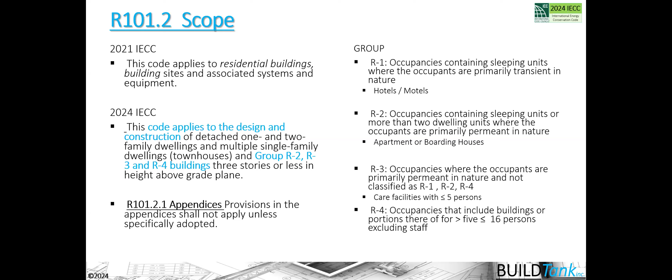So when we dive into chapter 1, we begin to talk about the scope of the code and the intent of the code. The scope documents changed a little bit. The code applies to the design and construction of detached and attached dwelling units. And then it talks about group 2, group 3, and group 4. And I just put a little refresher on the side there about what group 1 through 4 means. So if you don't know what that means, you can refresh yourself there.

The bigger change happened in the intent. The intent used to be a small paragraph that combined 3 sentences, only 2 of which remain, but now it's a big paragraph, and it's really changed quite a bit here. So the first change is that the code is intended to provide market-driven enforceable requirements there.

What that means, I think, is open to interpretation a little bit, but the idea is that, well, from my perspective anyway, the energy code is unjustly being thought of as the code that is increasing the cost of construction, when in reality, all codes and code advancement increase the cost of construction. And we also need to remember that, especially coming out of the pandemic, material costs and labor costs and all other kinds of things are influencing the cost of construction there.

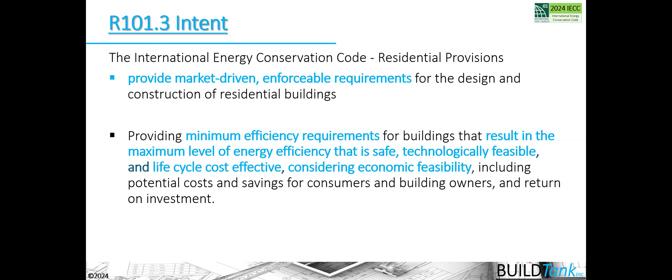So anyway, the code's also providing minimum efficiency requirements that result in the maximum level of energy efficiency that is safe, technologically feasible, and life cycle cost effective, considering economic feasibility and so forth. So you can see this whole focus on cost, but also this new concept of life cycle cost effectiveness, which means that we need to begin to think about carbon potentially, or other things that are affecting the life cycle cost of our buildings. Now, carbon isn't specifically referenced in the intent statement, so I don't want to misconstrue that there.

But it does bring up the question of what minimum compliance means, or what the word minimum itself means. And I want to throw this out because we tend to have a negative connotation with the word minimum as referenced with code specifically. And I want to be sure that we all understand that the word minimum doesn't have a good or bad connotation. It basically means that through a national consensus body process, we have agreed that these minimum requirements ensure health, safety, and efficiency in our homes, and that you can go beyond that, but the code is asking for a specific baseline of efficiency, which is deemed to be the minimum required. Again, that doesn't mean bad or good.

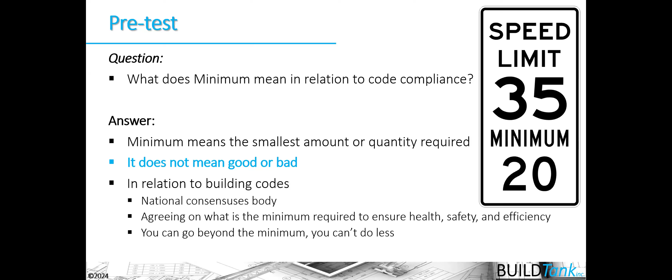It means basically that if you build to the minimum requirements of the code, you're going to have a well-performing house that meets those requirements, and people are going to, in general, be happy with that across the country. The majority of people will be happy with that.

The intent statement does continue on and say that there are all these optional supplemental requirements that could be looked at from a code perspective to achieve zero energy buildings by 2030, and that the Energy and Carbon Advisory Council, approved by the Board of Directors, will look at those things from a policy perspective. But what this is ultimately doing is moving anything that has to do with additional efficiency beyond what the code is looking for, things like electrification or solar ready, or even carbon counting and carbon sequestration in buildings, to the appendices, and it won't be housed inside the body of the code itself in the future, and now as well. The code includes non-mandatory appendices, and that's where it ultimately is going.

Requirements contained in the code will include, but are not limited to, prescriptive and performance-based pathways. So we need to remember that there are requirements in the code and there are compliance pathways in the code. And the requirements generally revolve around how you install a specific provision that's in the code, and the pathways are demonstrating that you're meeting the energy budget requirements of the code there.

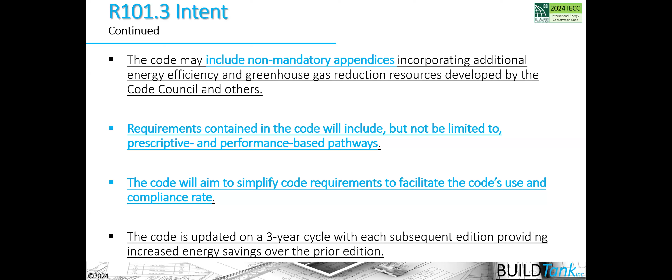So they're kind of two different things. The code will aim to simplify code requirements to facilitate the code's use and compliance rate. That's always something that the code is aiming to do, and that's what's happening right now as we begin the 2027 code development process, is that proposals are being made to help clarify requirements and make it more enforceable, and our ability to comply with those things will continue to happen there.

And then the last part of this intent statement includes statements that were already in the intent statement, these two last sentences, to provide flexibility. Basically, understanding the code and where flexibility is provided in the code really comes down to the compliance pathways in the code. And the code isn't intended to abridge safety, health, and environmental requirements.

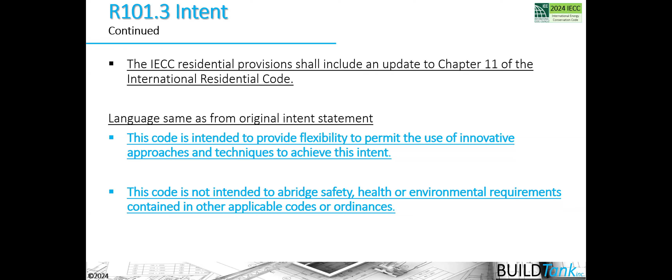So we need to remember that we're talking about a suite of codes that work synergistically together to create safe, healthy, environmental requirements or efficiency requirements that take place in our buildings when we're building to the code requirements, not only from the energy perspective, but the IRC perspective and the IMC and whatnot. Again, these are a suite of codes that work together here.

Okay, so above code programs can be used where such buildings also meet the requirements identified in table R405.2. So those are the requirements that are basically revolving around how you install specific things that are called out in the code. Generally, we're talking about insulation installation, air barrier and air sealing installation, installation with regards to mechanical systems. So doing a proper Manual J, S, and D, for example, those types of things are covered and put into the mandatory requirement table in the R405.2 section.

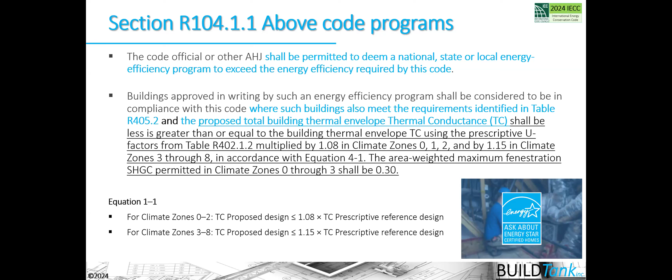But there are some people or organizations that might come to you and say, can we build an Energy Star house instead of following the actual requirements of the code? And you can do that to some extent. Remember that you still have to abide by the mandatory requirements of the code that are listed in the R405.2 section. Also remember that the word mandatory has been taken out of the code, so requirements are required, which in essence means that they're mandatory.

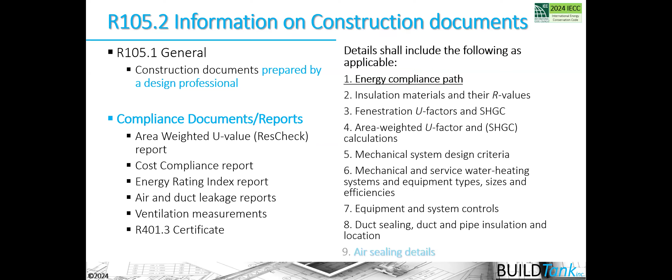Then we have the information on construction documents. This really hasn't changed much, but there is a section after this that is talking about solar ready systems. And if you are going to adopt this section of the code, the solar ready provisions need to be put on the construction documents as indicated here. So even though it's not in that construction document section, the solar ready systems do need to be put on the construction documents.

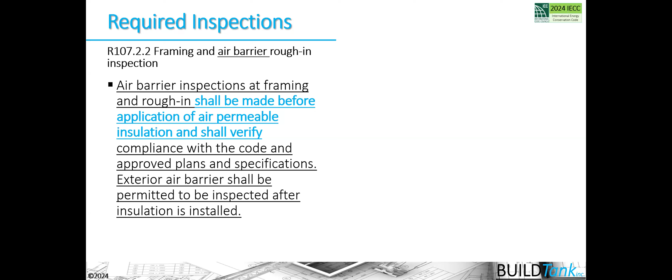Then we get into the inspection section of the code. And I point this out because this section right here has been added to it: air barrier inspections at framing and rough-in. But also you'll see that other sections of the code now call out specifically the inspection that's needed, but also tailor it to the energy code so that we're looking at corresponding R-values, correct location, and proper installation of the insulation that's been installed in our homes, for example.

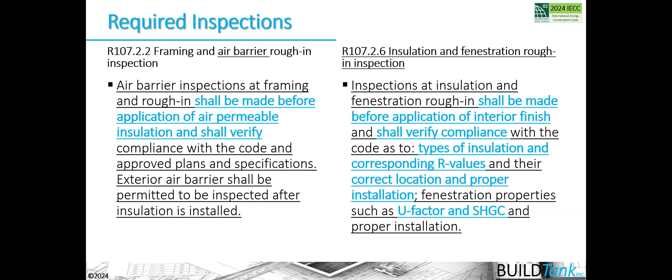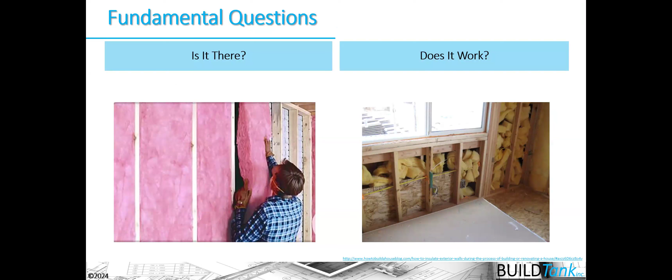Now it talks about other components that need to be inspected, and again, it's tailored from an energy code perspective, which means that we're really looking at our homes more from a performance perspective. We're looking at not only has the insulation been installed, but has it been installed so it works and performs, and does the R-value that's been installed meet or exceed what the builder or architect proposed in their compliance pathway for that building. So we need to ask: is it there, but does it actually work as it's been installed from the perspective of the code?

Which brings us to the last section in chapter 1 that I wanted to point out, which was approved third-party inspection agencies. This section has been revamped pretty substantially in order to help jurisdictions ensure that they're getting approved third-party inspection agencies that can help them enforce the code.

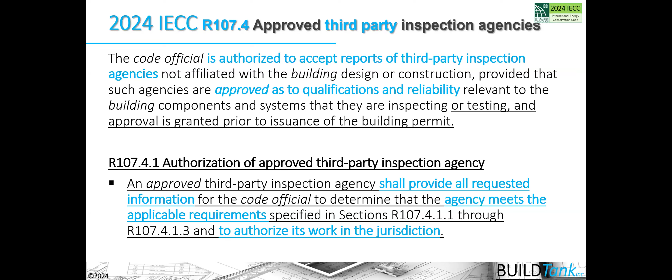The third party needs to provide requested information to the authority having jurisdiction, but they need to demonstrate their independence and ability to actually do the inspections. The third party needs to ensure they have the proper equipment, because the code doesn't prohibit a jurisdiction from buying a blower door and doing those inspections themselves. Most jurisdictions haven't wanted to go that route, so we need to ensure approved third parties have the equipment to actually do those types of inspections, like testing mechanical equipment or whole house leakage.

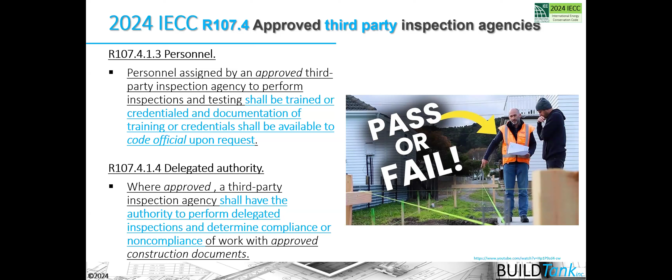This part makes it clear that generally speaking, it's not just an approved third-party individual you're hiring, but a company, and we need to ensure all the personnel within that company have the proper training to inspect to the requirements of the code. The third party you're hiring must actually have the authority to perform the delegated inspections that determine compliance with the code, meaning that if you're using an approved third party, you're giving them authority to approve an installation, or say it failed inspection and needs to be re-inspected. And lastly, we have to keep records and submit reports as required by this section of the code.

So really what this section of the code is doing now is saying that approved third parties and authorities having jurisdiction need to have a conversation, creating basically a scope of work so everybody's on the same page about what you're giving them authority to inspect and what you're not. You have the ability as a code official to approve a third party, but also to disapprove that third party, which in essence removes this perceived or actual conflict of interest about who's actually paying for this third party to do their work.

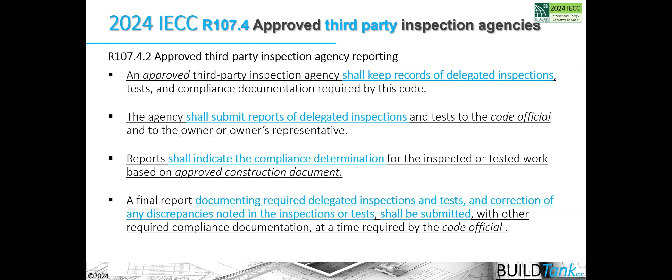So I urge you to take a look at this section and potentially utilize it so that we get better enforcement and compliance with the codes that are being adopted here.

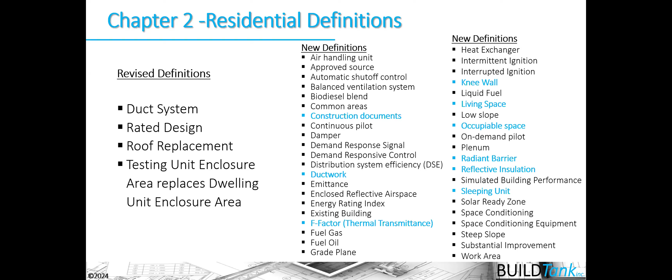Now, the definition sections always change and morph. Some definitions get redefined and new definitions get added to the code, like knee wall, construction documents, or ductwork. All these things get either redefined or added to the code, so you should always take a look at the definition sections to ensure you're up to date.

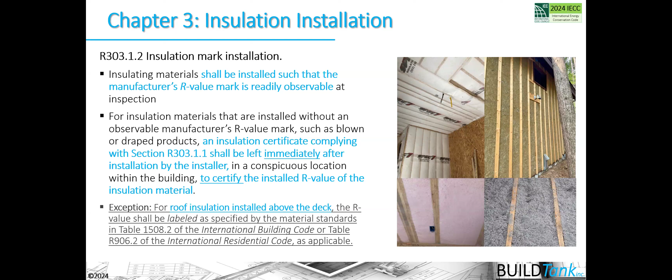This section didn't change dramatically, but I wanted to make sure everybody was aware that these insulation certificates are required, especially for insulation that doesn't have an R value mark on it. We have no idea what the R value of these materials are. These insulation certificates are now required to be left immediately after the installation by the installer, to certify the installed R value of the insulation material, because nobody other than the installer actually knows what the R value is—it's completely based on the density they set their blowing machine to. So make sure you're collecting those certificates after installation and comparing it to what they've proposed to put in the house.

Radiant barriers and all reflective insulations are now within the code in specific sections, in a much more robust way. So if you come across radiant barriers or reflective insulations, you now have places in the code to reference those things. Residential efficiency is covered in chapter 4.

Now moving to chapter 4, we're talking about requirements for air sealing and air barriers and insulation installation, as well as the compliance pathways that basically tell us to choose a compliance approach for permitting, comply with the provisions or requirements laid out in chapter 4, and then ultimately prove to the code official through testing or additional compliance documents that you've met the requirements of the code, and that what you proposed has actually been carried out to fruition to release the certificate of occupancy.

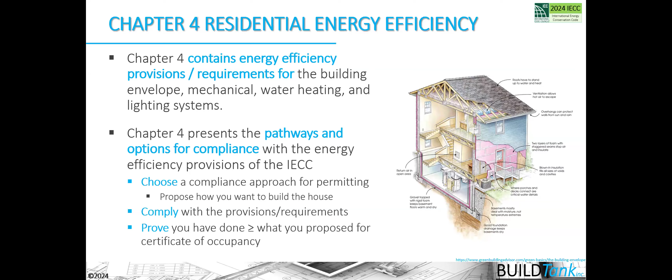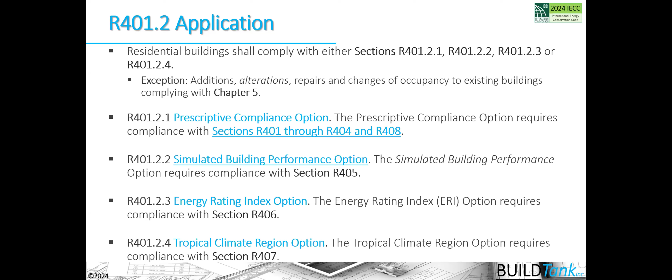With regards to the compliance pathways, we still have the prescriptive compliance option, the simulated building performance compliance option, and the energy rating index compliance option, as well as the tropical climate region option that we won't really be talking about here. You still need to provide the certificate in order to get your certificate of occupancy. Some things have been added to this certificate, like the R408 additional efficiency measures and the location and dimension of the solar ready zone, where one is provided.

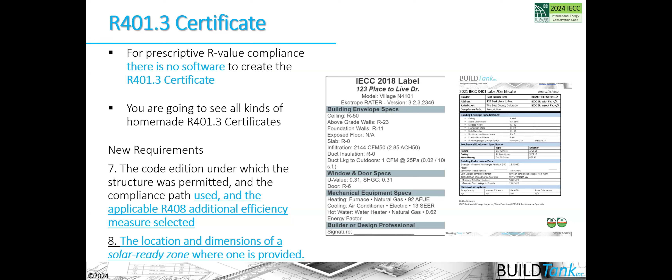These certificates are generally printed out of software when you're using a software-based compliance pathway. When you're not using a software compliance pathway, you might see a certificate that's hand-generated, like the one on the right here, for the R-value compliance approach, for example, that doesn't have a software accompanying it.

The building thermal envelope is basically broken down into two prescriptive pathways. You can either use the prescriptive R-value, U-value table, or you can use what's now called the total component performance alternative. It used to be called the area weighted U-value or UA performance alternative, but you'll see here quickly why that name has been changed.

Remember that if you choose to use the prescriptive R-value, U-value table, it is the least flexible compliance option. There's really no compliance tool other than declaring to the code official that you're going to use the thou-shalt-do prescriptive compliance R-value table. You need to add those R-values to your permit set, and then through inspection and documentation, you'll have that.

There's no longer a mention of the additional efficiency packages in this specific section, as was done in the 2021 IECC. You need to go to section R408 to see anything that has to do with additional efficiency packages. But we do need to note that the additional efficiency packages are only in relationship to the prescriptive compliance options. The performance compliance options have a different way of getting that additional efficiency that we'll see here in a minute.

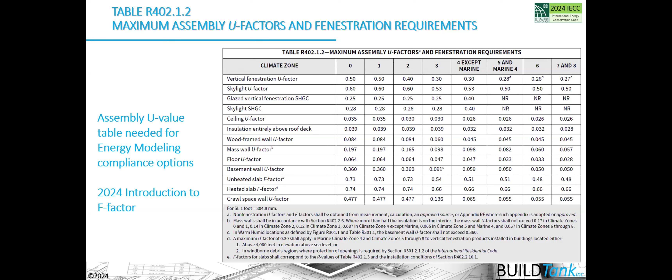Now, the R-value and U-value tables have been reoriented. Their X-Y axis has changed so that all the requirements are down the left-hand side and the climate zones are across the top here. But the actual U-values haven't changed that significantly.

Same with the R-value table here. You can see in climate zone 5, these are the changes that happened in climate zone 5. So there are changes that happened in both these tables, but the most significant change is the reorientation of the table, which the code development body felt made this table easier to read and understand.

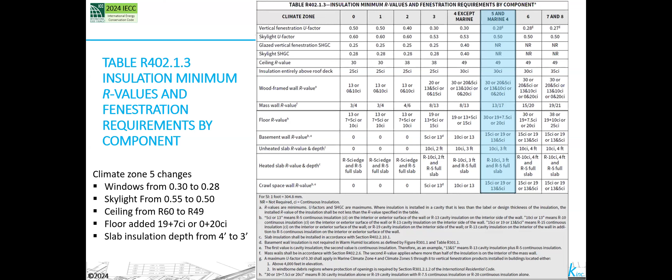You also want to always look at the footnotes of these tables. The footnotes talk about how R-values change when insulation is compressed in a cavity. It tells you what continuous and cavity insulation means. It gives you some variance or ability to change the U-factor of windows in certain climate zones. So you definitely want to review the footnotes associated with these tables.

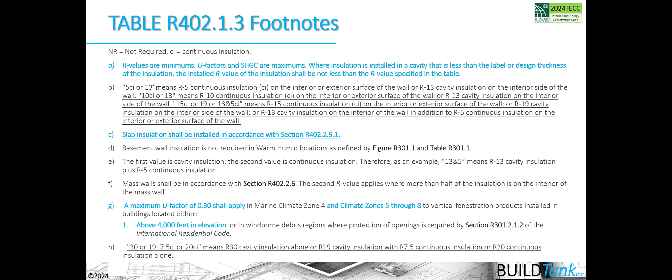And just as a reminder, the U-factor table is talking about the assembly of things. So the U-factor of a window, for example, is talking about the window in its entirety, its assembly: the wood frame, the edge spacer, the two layers of glass, the gas that might be in there, the hardware that's used to open and close the window. All of those things come together to create the U-value.

Each of those things has a component R-value, and R-value is the reciprocal of the U-value, or the U-value is the reciprocal of R-value. So basically, the R-values table and the U-value table are expressing the same thing in different ways. One is an assembly and one is a component that you put into the assembly.

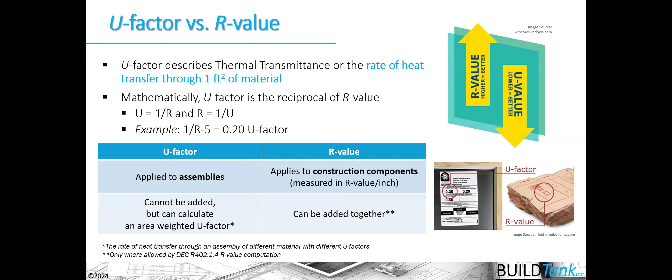Okay, the other modeling approaches for compliance are either the prescriptive component performance alternative, the simulated building performance, or the energy rating index. This gives you more flexibility. It helps you understand the cost effectiveness of the components and assemblies you're putting together to demonstrate compliance. And it improves the professionalism of our contractors and industry, because we need to really think about what we're installing in our homes rather than being told what to install.

The best thing about these different compliance approaches that use an energy modeling software is that you can try and fail 10,000 times before you buy a nail to build that house, and ultimately succeed in meeting the requirements of the code, because they allow you to do what we call a trade-off.

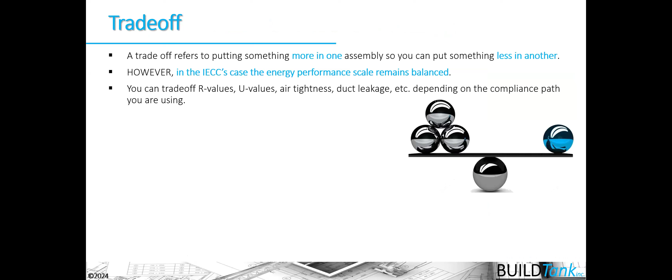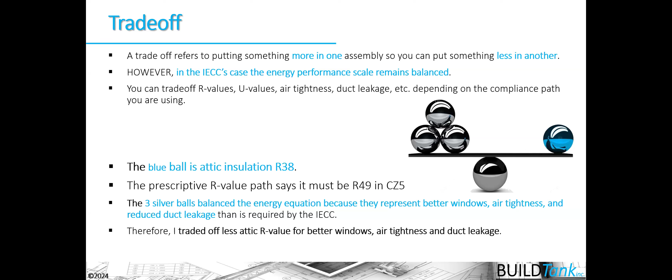The trade-off allows you to put something more in one location so you can put something less in another location. So in this example, if I decide to put R38 attic insulation in the attic, that would be represented by the blue ball here. I might need to choose three other things to do something slightly more on in order to keep the balanced energy budget that the code is requiring us to achieve in order to demonstrate compliance with the code.

There are 3 softwares that allow you to do these types of energy trade-offs or energy compliance pathways. Reminder that the REScheck software only allows you to do the total UA alternative, or what is now called the total component alternative approach, whereas REMRate and Ekotrope software allow you to comply or do energy modeling for all of the compliance approaches.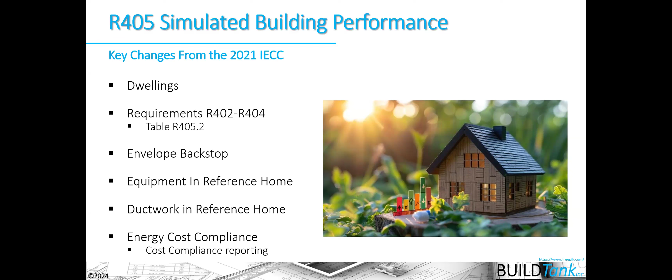So the next compliance approach is the simulated building performance approach. The key change here is that we're now talking about dwellings rather than homes or buildings, making sure that we understand these performance approaches can be used on attached dwelling units or multifamily 3 stories or less. The requirements table has been modified slightly, making sure we understand that all of the requirements detailed in sections R402 through R404, how you install these things, are required by this pathway as well. The envelope backstop changed, equipment in the reference home changed, ductwork in the reference home changed, and so on.

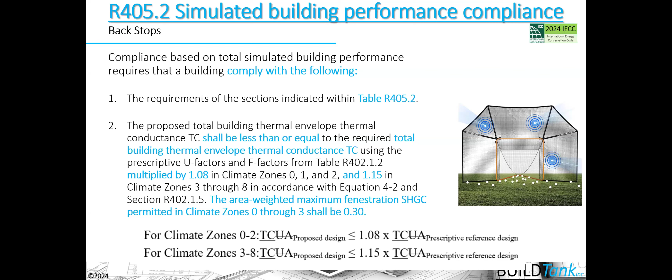Going to the backstops, you see that the backstop has been changed to focus on the total conductance through the building thermal envelope. This is why the additional efficiency packages aren't required for this compliance pathway, because if you're in climate zones 3 through 8, now your total building thermal conductance has to be 15% better than what would normally be required by the 2024 IECC. So in essence, the additional efficiency packages are getting that 15% increase in efficiency. To give you that same type of flexibility, you just have to now get 15% efficiency in your total thermal conductance while doing the energy modeling. You're able to choose a variety of different ways of doing that with your building thermal envelope in this pathway. So it still gives you a lot of flexibility, but the new requirement is that you have to be 15% better if you're in climate zones 3 through 8.

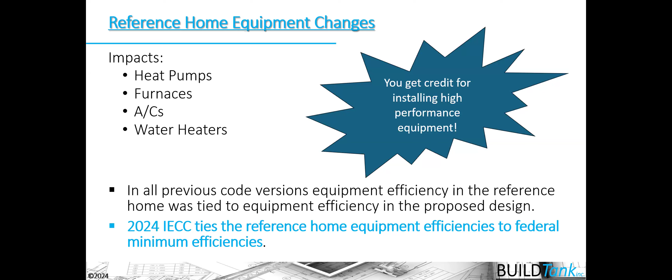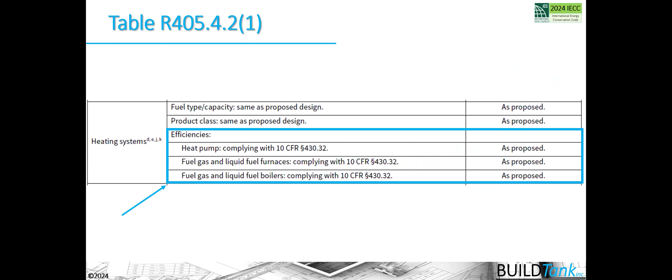In the reference home, now you are looking at heat pumps, furnaces, air conditioners, and water heaters. The 2024 IECC ties the reference home equipment efficiencies to the federal minimum efficiencies. So now if you're installing a heat pump that has an efficiency significantly better or more efficient than the federal minimum efficiencies, you're going to get credit in your trade-off budget for this. So again, you have more and more flexibility here. You can see that if you go into the reference home itself, published in section R405.4.2, it's talked about in the reference home versus what you're proposing to put in that house. So if you propose a heat pump that has a COP of 3, you're going to now get credit for that in your trade-off budget.

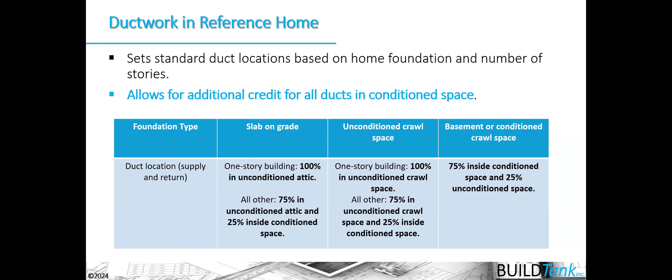Ductwork works the same way, where the location of the ductwork can now give you additional trade-offs that weren't available in the 2021 and earlier code editions. So if you have ducts all located in conditioned space, you're going to get some trade-off credits for that. Remember that the softwares that can do this type of energy modeling does not include REScheck. You're only looking at REM Rate, Ekotrope, or potentially Energy Gauge. You're unlikely to see the Energy Gauge software in our climate zone because it's primarily used in Florida.

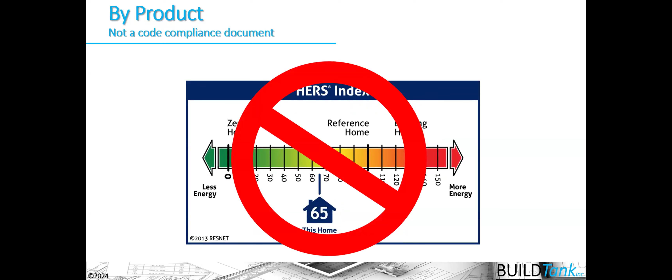Also, we need to understand that as a byproduct of the simulated building performance approach, you might see a HERS energy rating index generated, but that HERS score is not an index score that can be used for compliance with the IECC. The energy rating index alternative used in the IECC has changed a little bit. Again, there are references to dwelling units, and the requirements table should be table R406.2, not 5.

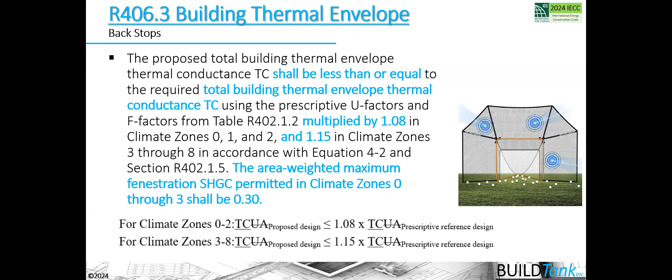There are ensuring that the requirements that are in the R402 through R404 sections are implemented, as well as the envelope backstops and other requirements here. So let's go in and make it clear that the envelope backstop is the same backstop that was required in the R405 section, basically ensuring that the thermal conductance of the building thermal envelope in climate zones 3 through 8 is 15% better than. Again, you don't have to deal with additional efficiency packages in this pathway because this is how you're getting that additional efficiency through this backstop here.

When you're calculating the energy rating index score up until this code, the 2024 IECC, there was an amendment to the ANSI standard 301 for how you calculate the energy rating index score that removed, that changed the ventilation, how ventilation was calculated in the software here. That portion of the code was removed in the 2024 IECC, and now the ANSI standard 301 is being used as intended there.

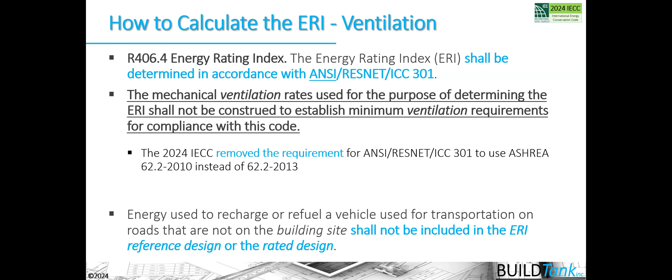The ANSI standard is also what's used to calculate the ERI for the HERS Energy Rating Index, but those scores now are closer together, but they won't be exactly the same for a variety of other reasons that we don't have time to go into.

But you should know that they are closer to each other than they ever have been. Now, the ERI compliance approach here is asking you to do an energy model to benchmark the house on an energy rating scale and then determine if the energy rating that that house gets is equal to or less than the energy rating requirement that is detailed out in this table here. You can see in climate zone 5, you now have to achieve an energy rating index of 54 or less.

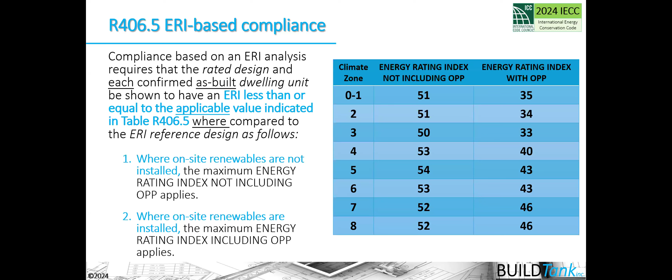And if you also install on-site power production for that house, you now have to be at least below a 43 on this table here. So you want to make sure that you're looking at the on-site renewables that you're installing here that are called out specifically in the R406.5 section here.

And it says that the energy rating index shall be permitted using the average dwelling unit energy rating index. Here, that's number 2 in the exceptions, which is basically meaning that if you have a stacked multifamily building that's 3 stories or less, that's governed by the residential energy code, that you can use an average of all of those scores to comply with the score here.

Although you will see here in a second that sampling is allowed too, specifically for energy rating index scores and performance testing requirements here.

Verification of the approved third agency specifically for this path has changed a little bit here. You can use the third party to develop the ERI score, but you still need to make a choice about all those requirements, the R402 through R404 sections. Are they going to be completed and inspected by the authority having jurisdictions or by the approved third party? And therefore, you need to go back into Chapter 1 in order to understand who's required and that the third party has the same skill levels as your jurisdiction inspectors do.

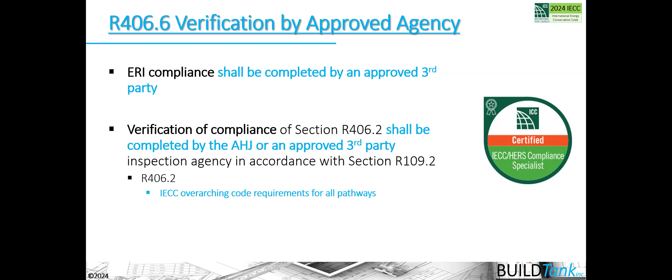The compliance softwares that have been available to do compliance for the software compliance approaches now are being looked at a little bit more closely by the IECC. There's this section that says that the ERI software shall be using approved software tools that are defined by the ANSI 301 standard there.

You'll see also in the R405 section that there's a reference to approved softwares, and basically my belief is that sometime in the future, ICC is going to ask RESNET to have better oversight over the softwares and how softwares are interpreting the code within the body of their software there, which really isn't happening at this part, although this is a step forward in the right direction there.

Okay, so now we're moving away from the different compliance pathways to the actual requirements in the code. The requirements of the code are listed in R402 through R404 section of the code.

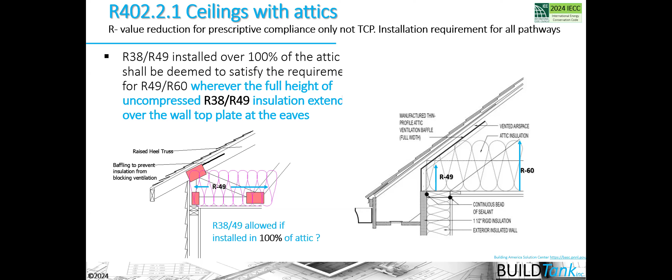But it's also not only allowing you to reduce the R value, but it's also saying that that R value needs to be installed completely over the top plate. Therefore, you're probably going to have to install a raised heel truss in order to get that full depth of insulation, uncompressed insulation over the top plate there.

And that's why the requirements listed within this section for how you install something are required regardless of the compliance approach that you actually use.

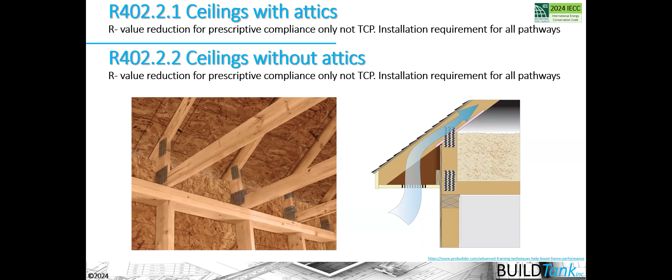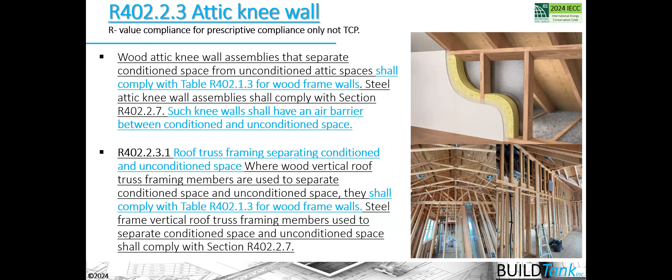Knee walls are new to the code in the 2024 cycle. They're defined as a wall that separates conditioned space from attic space or unconditioned attic spaces. You want to look at the knee wall section to make sure you understand all the requirements associated with knee walls, not only there, but also in the air barrier, air sealing, and insulation installation table. Steel framing has been modified slightly.

Steel framing in ceilings, walls, and floors shall comply with the insulation requirements in table R402, the R-value table, and the U-factor requirements in table R402.1.2, and also within the table that is specific to steel framing, that's in the code as well.

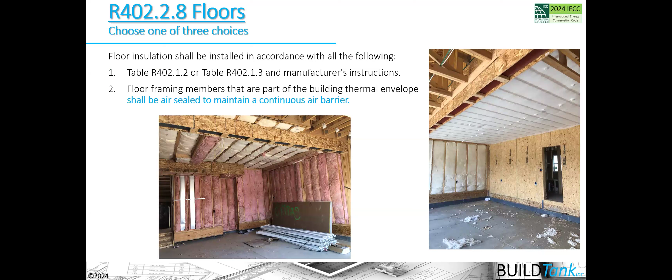The floors section has been modified a little bit as well, because you're now allowed 3 different ways to install the insulation in the floor section. They have broken it out even more to try to make it more clear about the different ways the installation of floor insulation is allowed now.

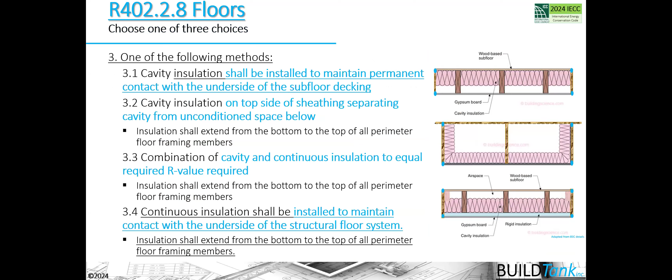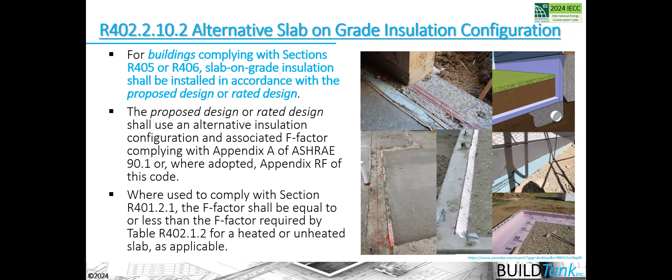In the same way, the slab insulation installation section specific to alternative slabs: basically, when installing slab insulation for the R405 or R406 pathways, you have the ability to trade it off or install less insulation, or potentially install the insulation in different ways than might be allowed in the other compliance approaches. That's called out specifically now in this alternative slab-on-grade insulation configuration.

Crawl space wall insulation now references the floor insulation installation section, R402.2.8, which means that if you have a vented crawl space and you're insulating that floor system like this gentleman is doing, you now need to sheathe the bottom of that floor assembly in order to make it work and be in compliance with the floor section that we briefly went over earlier.

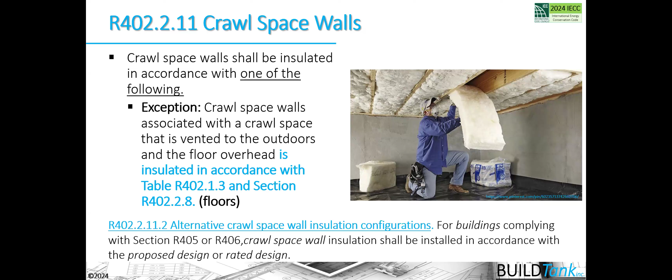There's also this alternative crawl space wall insulation configuration, which again references sections R405 and R406, those performance energy modeling compliance approaches, where you might install either less insulation or install the insulation in a different configuration. Radiant barriers, as I said earlier, are called out specifically in this section as well now, so you need to look at those. Those are the biggest changes in the R402 section with regards to insulation, air barriers, and air sealing.

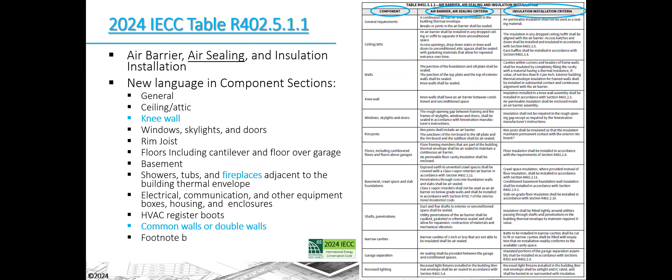The air leakage testing section now gets us into the air sealing, air barrier, and insulation installation table. There have been a couple key changes here: the addition of knee walls to this table, and additions for fireplaces and common walls or double walls like shaft liner area separation walls. The details required on your construction documents largely come from this section of the code.

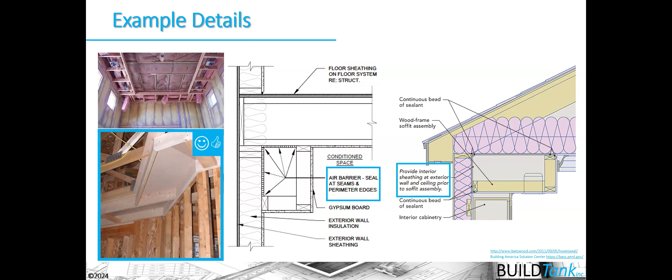These requirements are again mandatory in the code. Therefore, we need to be able to install them properly and ensure that the information from that table gets out to the field so that they get installed properly. So these are details, for example, for how you install the air barriers properly in a drop ceiling, or in a knee wall.

This is the new knee wall section. The knee wall shall have an air barrier between conditioned and unconditioned space, and the insulation in that knee wall shall be installed in accordance with section R402.2.3, which basically means the knee wall insulation needs to be the same as that of any other exterior wall insulation.

And if it's not, then you need to move to a software energy modeling compliance approach rather than the R-value table compliance approach.

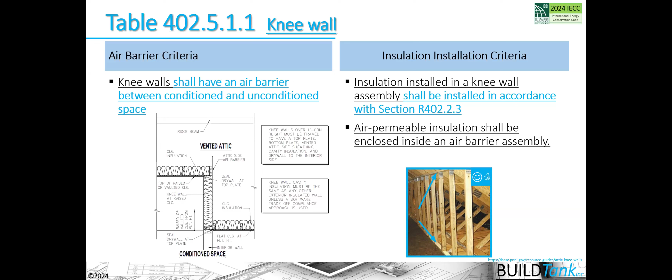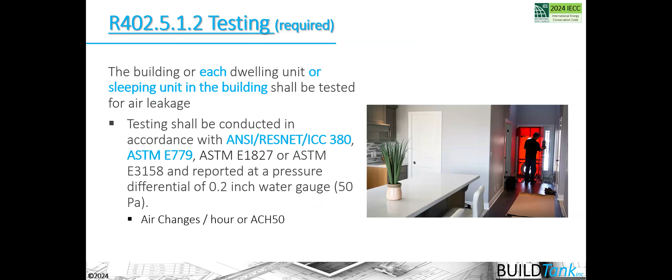Testing requirements have been clarified to ensure that we know every sleeping unit in a building, in essence every dwelling unit in a multifamily building, needs to be tested. There are some exceptions for attached garages, which is basically saying that an attached garage, whether it's insulated and heated or not, is always outside the building thermal envelope, and therefore does not need to be tested by itself or in conjunction with the rest of the building.

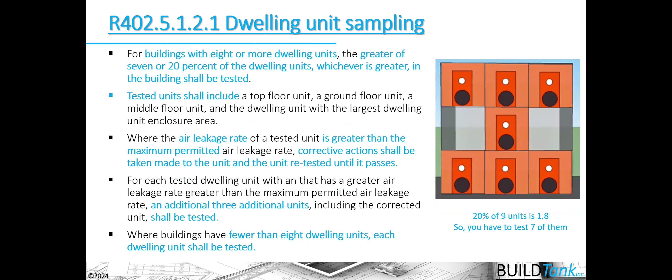Dwelling units can now be sampled. So if you have more than 7 dwelling units, then 20% of those units actually need to be tested, or you can test 100% of them as you normally would.

The maximum air leakage rates have changed as well. Now it's based on climate zone.

So in our climate zone 3 through 5, it hasn't changed. You still have to reach 3 air changes per hour there. And now it's more clearly speaking to compliance pathways R405 and R406 that you do have the ability to trade upward. In essence, your air leakage can be worse if your R values in your building thermal envelope are better. It's not normally how we do a trade-off, but that type of trade-off can happen that way.

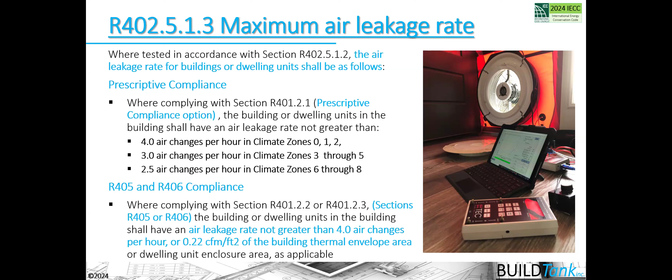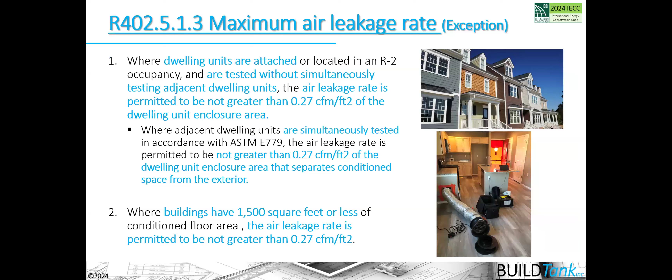So you want to take a look at that section to make sure that you're understanding what the maximum air leakage rates are per your climate zone. Again, in climate zone 3 through 5, it really hasn't changed. We're still at 3 air changes per hour here. You are allowed some exceptions to use a different metric for air leakage quantification, basically a CFM per square foot of enclosure area metric if you have attached housing, or if your dwelling is less than 1,500 square feet of area as well. So that's floor area we're talking about here.

Okay, section R403 deals with systems, and these systems have had some changes. There's some understanding that we're installing more and more heat pumps, and therefore we need to think about the supplemental heat there. That section is new to the system section in the code here.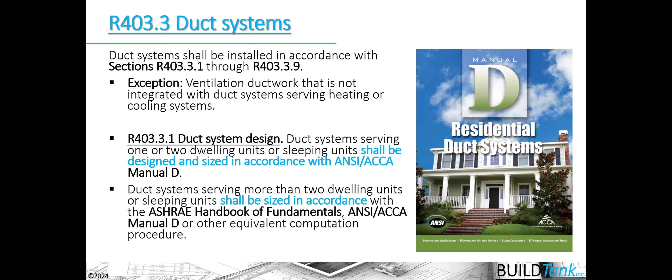Duct systems, we've always had to design our duct systems in accordance with Manual J, which gives us the heat load calculation, and Manual S that ensures that we have the equipment that has the capacity to meet the load that we calculated in Manual J. But we never really talked about Manual D or designing a duct system to install in the house. So duct systems now need to be designed in accordance with Manual D, which is an ACCA manual that talks about designing a duct system and understanding the friction rate and the losses that happen through duct systems.

So this is the section that hasn't changed, that ensures that we're using Manual S and Manual J there. But in essence, those things need to be enforced in the code, and Manual D has been added to it.

Hey, Robbie? Yes. I just want to interject. I know we only have 10 minutes or so left, and you still got some content to go through. So if we need to, we can always add another session so that we don't have to rush through some of the content, if that's better for you. Because I know people want to hear about the significant changes and understand them. So just an idea, take your time, and then if needed, we can always add another session or something. Yeah. Okay.

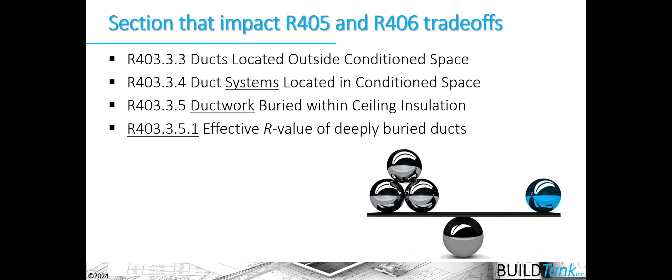What I wanted to point out in this section is that these pieces of the R403 section of the code really only impact the R405 and R406 energy performance compliance pathways because they address things that you could take advantage of in your trade-offs. So for example, if your ducts are located inside conditioned space or they're insulated better, you could take advantage of that in your energy trade-offs for your compliance approaches.

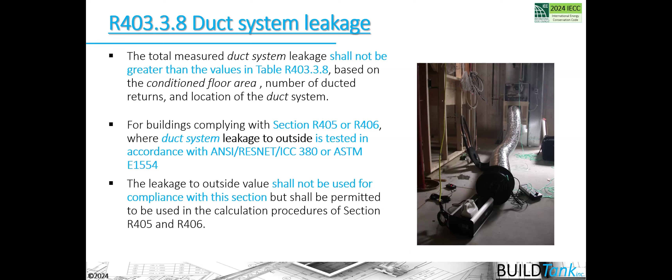With regards to duct leakage, the duct leakage system has been defined more holistically in order to ensure that the duct systems in their entirety are tested. The buildings complying with sections R405 and R406 need to be tested in accordance with a new standard that has been added to the code. And the compliance metric that you're using to demonstrate compliance with the duct leakage requirements has changed and it's been put into a table. So now if you have a certain number of returns in your house, you might be allowed to have slightly more leaky systems than otherwise.

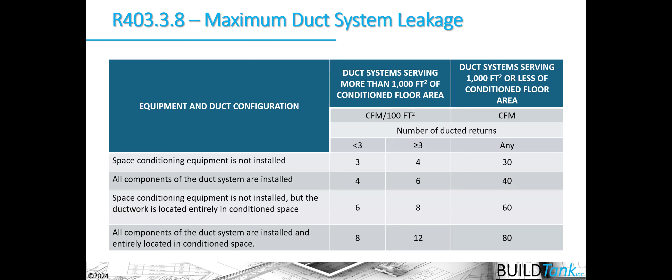And if your houses are smaller than 1,000 square feet, you're at a fixed level of required duct leakage that you have to achieve. So you want to look at the duct leakage metrics that are put into this table now. Dwelling units can be sampled for duct leakage as well, so you want to look at that as well. With regards to hot water pipe insulation and other hot water systems, these sections of the code are new or have been revised slightly as well.

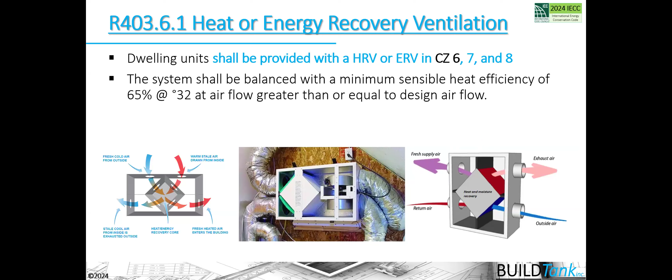Mechanical ventilation systems are governed by the code here, and the mechanical ventilation requirement that you put in a balanced ventilation system or an energy or heat recovery ventilation system has dropped down to climate zone 6. So now in climate zones 6, 7, and 8, you have that requirement to put in a heat recovery ventilation system. As always, since the 2021, you're required to test all ventilation systems.

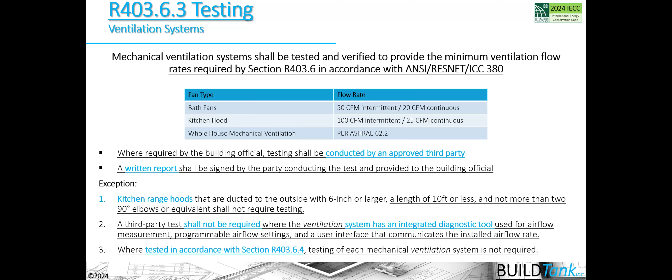So that's bath fans, kitchen hoods, whole house mechanical ventilation. And that testing demonstrates that they're compliant with the IRC requirements for how much air these systems are required to push. And you are allowed to sample that rather than test every single system in a home.

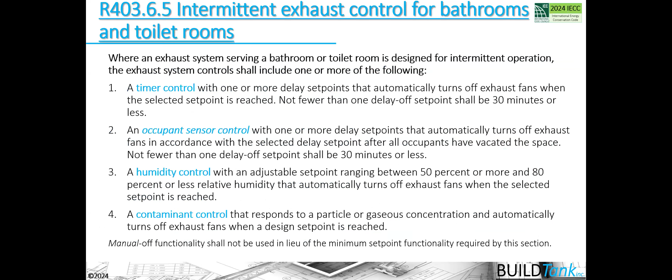Intermittent exhaust controls for bathrooms and toilet rooms is new to the code. So you're going to see that there's a whole section here dealing with controls and exhaust systems that is new to the code. And you'll want to make sure that you're aware of those requirements and that you're looking for them there.

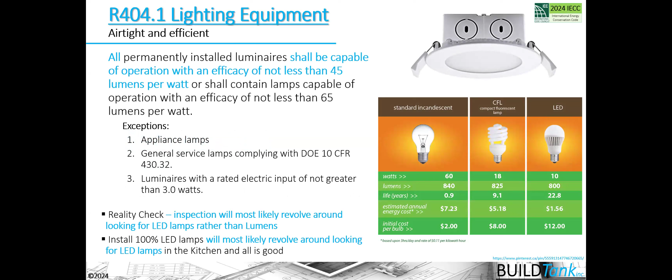Section R404 deals with electric power, lighting and renewable energy systems. Now, instead of a percentage of all luminaires being required to be energy efficient, all systems are required to be efficient. Basically, we're looking for LED lamps in all fixtures is really what this section is getting at.

Lighting changes have dealt with exterior lighting, interior lighting controls, exterior lighting controls, and renewable energy certificates that are governed by this section of the code. So you want to make sure that you look at those sections. You can see that the lighting section is starting to mirror what we see in the commercial section of the code as well.

And then lastly, we have the R408 additional efficiency requirements. Remember that the R408 additional efficiency requirements are specific to the prescriptive compliance alternative only, and that the additional efficiency has been gotten through the backstop in the R405 and R406 sections.

So what you want to know is that you have to get at least 10 credits from the section if you're using the prescriptive compliance alternative, and that those 10 credits are roughly increasing the efficiency of that pathway's compliance by about 15% in climate zones 3 through 8, in the same way that the 15% thermal conductance backstop is increasing the efficiency in sections R405 and R406.

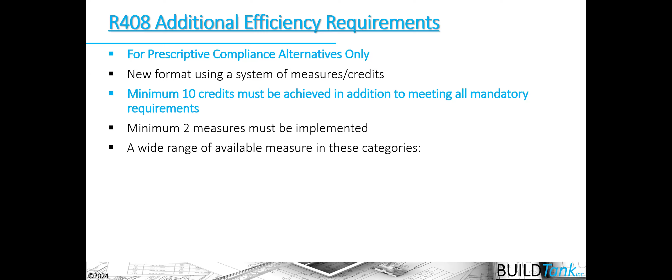So you're now given these credit choices in all of these different categories. You'll see that there's a table within the R408 section, and you need to choose in your climate zone what you'd like to do, and it gives you points per climate zone for what you can do.

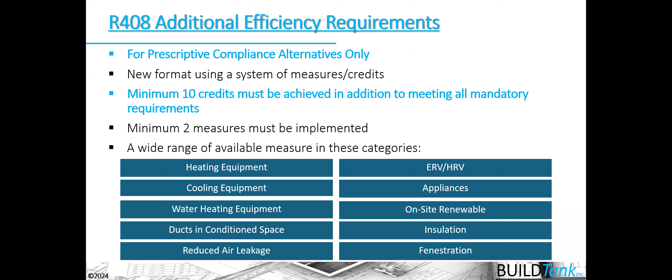So let's say you choose ground source heat pumps. You'll see that ground source heat pumps in every climate zone is more than 10 credits. You will have to choose at least one more credit from that zone. So that goes back to these requirements: a minimum of 2 measures must be implemented. So even though you have to get a total of 10 credits, if you choose a credit that already gives 10 or more points, you'll have to choose a second credit.

Okay, so yes, I do believe that we need to break out these sessions into longer sessions to really get into the significant changes. You can take advantage of my session at the Colorado Institute's Code Education conference happening in March. We'll be going through these in much more depth, or other Colorado Energy Office trainings coming up that will look at sections of the code broken out in more depth so that we can get into more detail about specific changes.

But basically, I want you to be aware that there's a lot of flexibility that's allowed in the code. But as the Dalai Lama says, we need to learn the rules so that we know how to break them properly. So you need to go into those compliance options and learn about the trade-offs that are allowed so that you don't have to be just told what to put into the assemblies. You can figure out the most cost-effective ways to build the assemblies that meet the intent of the code.

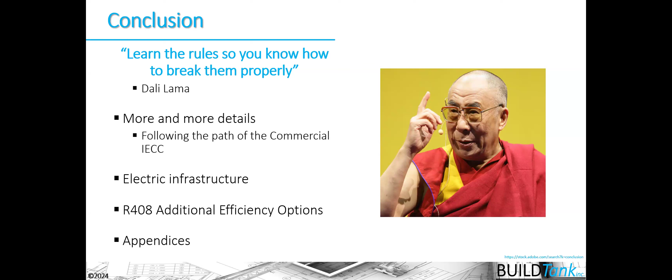You can see that a lot of the details that have been added are starting to mirror the commercial section of the code, that there's some electric infrastructure that's been added to the code, and that the R408 additional efficiency options now only reflect requirements for the prescriptive compliance pathways, because the other compliance pathways are increasing their efficiency through their backstops, and that anything that's innovative in the code with regards to going to zero or solar or electric ready has been allocated to the appendices and is now optional for people to potentially adopt.